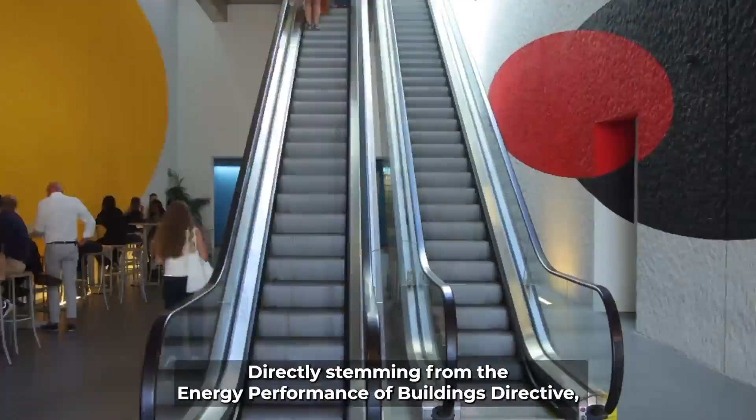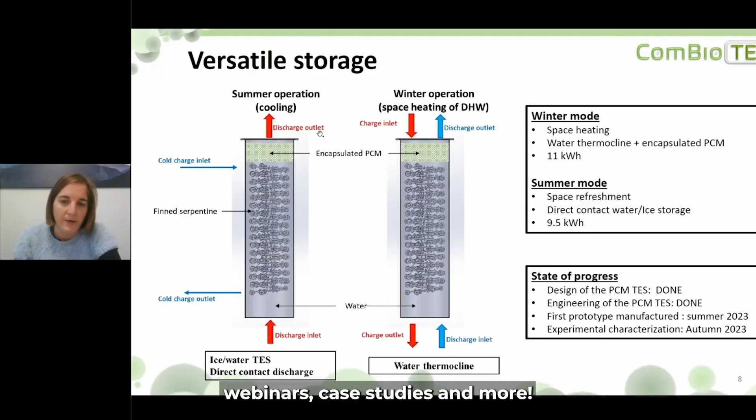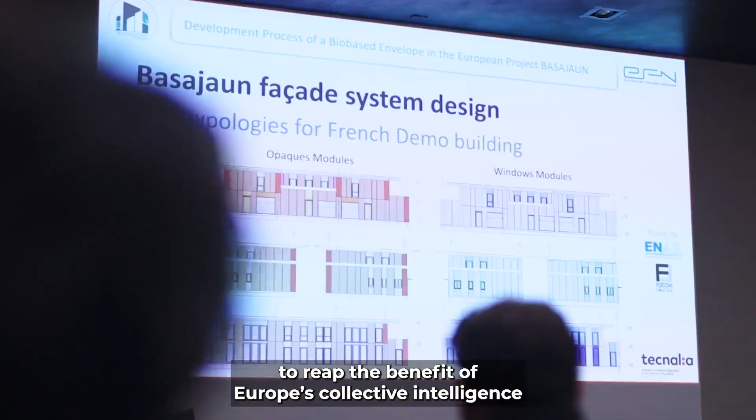Welcome to Build Up, the European Commission's portal for energy efficiency and renewable energy in buildings. Directly stemming from the Energy Performance of Buildings Directive, Build Up is the meeting place for everyone involved in making the European building and construction sector more energy efficient. Every month we focus on a topic that is key to making Europe's buildings as energy efficient as possible. Exploring that, you can find the latest content such as expert talks, webinars, case studies and more. From architects and engineers to academics and policy makers, we've got you covered. Build Up brings together thousands of registered members to reap the benefit of Europe's collective intelligence on all aspects of energy efficiency and renewable energy in buildings.

The Build Up portal benefits from the expertise of our ambassadors. Drawn from industry and academia, the ambassadors bridge the gap between EU and national level and help shape our editorial content. Want to promote your work?

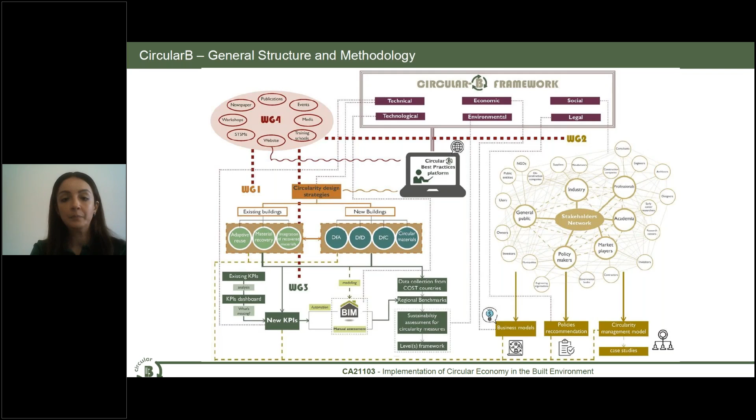Working Group 4 is responsible for the dissemination of our results through publications, events, media, websites, etc. Our final output is the CircularB framework with 6 dimensions: technical, technological, economic, environmental, social, and legal. Following this methodology, our projected outcomes are listed in this slide.

We'll have the state-of-the-art synthesis. We are currently working on a report analyzing the different types of barriers facing circularity implementation in buildings. We will be delivering a report on innovative solutions and best practices. We're about to launch the e-learning platform on the CircularB website, focusing on best practices.

Other topics include business models and financial studies, standards and policies at multiple levels, the management model for circularity supported by case studies, and the circularity KPIs dashboard, which will contribute to our ultimate goal of delivering a circularity inclusive framework and tool, later integrated into a broader sustainability perspective and automated within a BIM environment.

Our achievements to date include a book we managed to publish at the beginning of this year. It's a roadmap towards circularity in the built environment and includes the proceedings of our first workshop, dealing with different topics about our action themes.

We are currently dealing with the publication of our deliverable tool, a systematic state-of-the-art that follows a systematic approach to circularity in buildings, starting from materials through building systems to individual buildings and ultimately to the urban built environment. We've also published some journal papers on different topics, and standards and policies reports at international, national, and European levels.

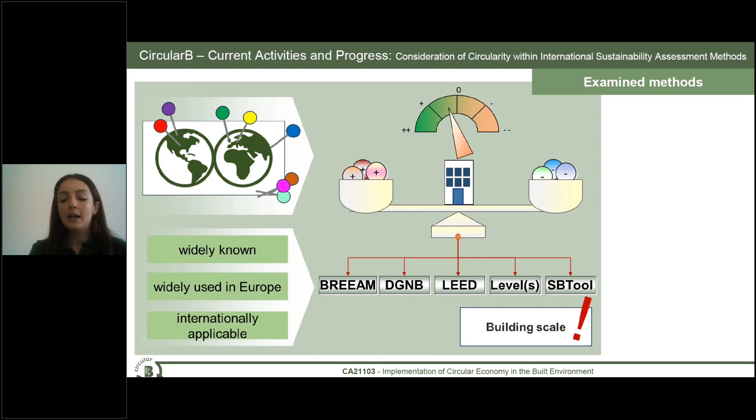The third activity that I'm going to present today was held within WG3, and it was about the consideration of circularity implementation within international sustainability schemes. So what we did in this activity is that we analyzed the relationship patterns between circular economy and sustainability, and we highlighted the differences and the borderline between the two concepts to use eventually a circular economy framework for the waste hierarchy, the 10 R's principle, let's say, to be analyzed within 5 well-known sustainability schemes: BREEAM, DGNB, LEED, Level(s), and SBTool.

So what we did within this activity is that we created expert groups, each responsible for one of the 5 international sustainability schemes, and each of the experts analyzed each R principle implementation within each credit, indicator or criterion of these 5 frameworks. Actually, we got some pretty interesting results, and I would like to invite you all to consult the results in our D2 that will be published very soon regarding this research.

So the final activity sample that I'm going to present today is the circular economy key performance indicators dashboard that we are developing also in working group 3. We started working on the dashboard this year, started in November, and we are going to deal with the categorization of different indicator types over dimensions and factors for circularity and sustainability. We're going to consider also process factors, contextual factors, including the political, cultural, local, and regional factors.

The indicators also are going to be classified according to their scope, whether they are addressing a whole building level, a specific system level like a structure or the envelope of a building, or whether they are addressing components and materials. We are also considering the classification of the indicators over the different life cycle stages of buildings. And we are using as references different tools and frameworks that are existing in the literature, standards and ISOs, and also circularity implementation patterns within sustainability frameworks.

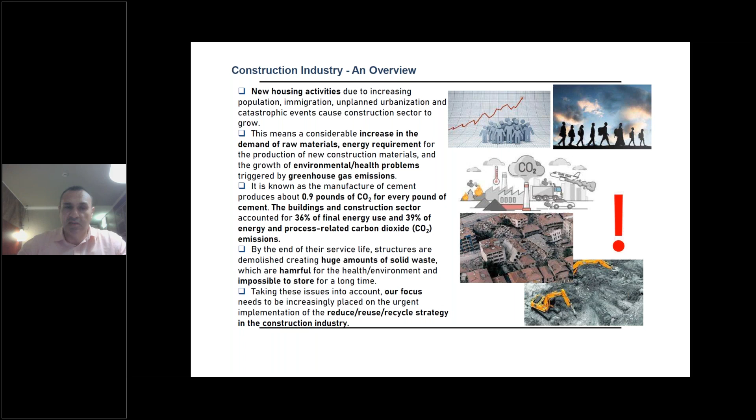For example, just during the production of Portland cement, around a ton of carbon dioxide emissions per ton of Portland cement are released, plus around 2 tons of raw materials will be used for the production of each Portland cement. In addition, a significant amount of construction and demolition waste is generated as a result of activities such as maintenance, repair, and demolition of buildings, and their direct discharge to landfills causes great damage to both environment and economy.

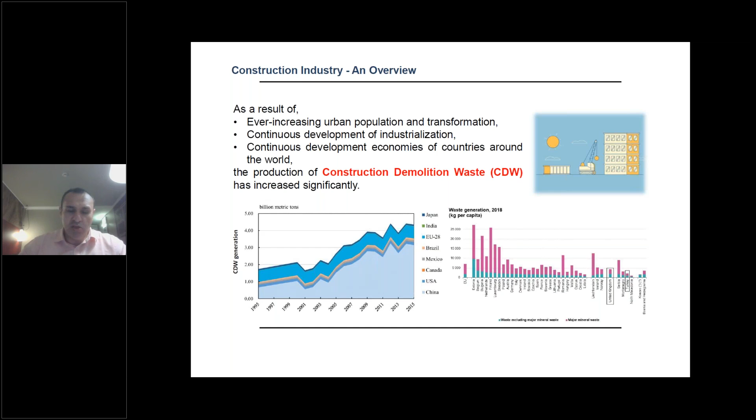So the random disposal of this construction and demolition waste is a major environmental threat, not only for our country, but all around the world. And at the same time, not reusing these waste materials is contrary to the concept of the circular economy. These graphs in this table show the amount of construction and demolition waste generated worldwide, which has reached, unfortunately, billions of tons.

As I said at the beginning of my presentation, on 6 February 2023, 2 earthquakes with magnitudes of 7.7 and 7.6 occurred in Turkey. The 2 major earthquakes caused damage in an area of approximately 350,000 square kilometers, affecting 14 million people and 16% of Turkey's population, and at least 350,000 buildings were destroyed.

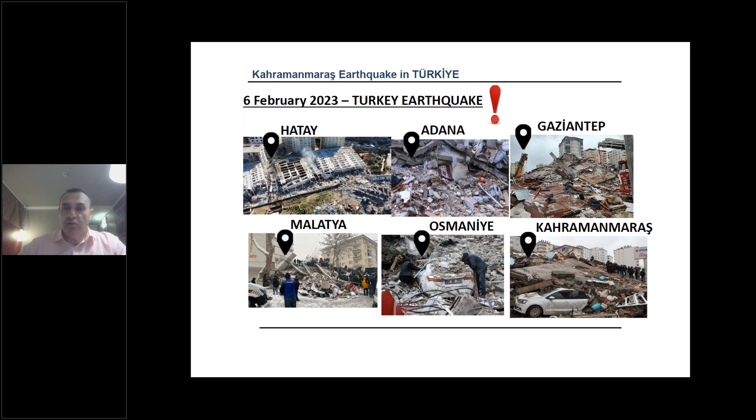Unfortunately, with the material and moral damage and the loss of life, the earthquakes have severely affected our country. It is clear that we need to work seriously to rebuild the earthquake zone and to ensure the continuity of our lives.

We made lots of investigations in the earthquake zone, and they showed that approximately 400 million tons of mixed earthquake waste was generated. This mixed earthquake waste includes concrete, stones, tiles, bricks, glass, plastic, different kinds of metals, and automobile parts. I can easily say it's not possible to recycle them in bulk, so they should be carefully separated one by one according to their types.

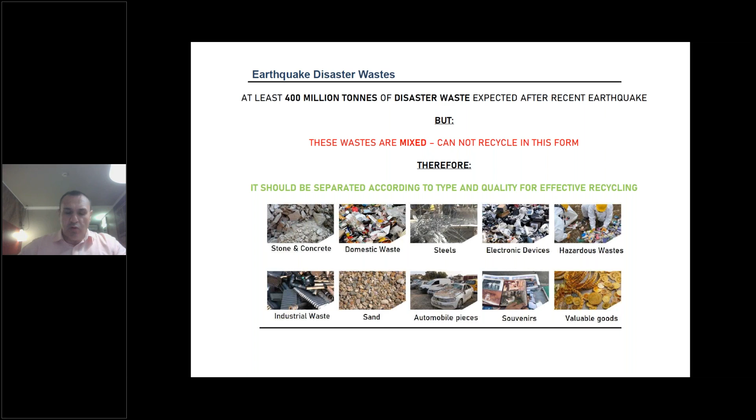By separating this waste, it will be re-evaluated easily in the construction industry and will provide significant economic and environmental benefits. Although the management of hundreds of millions of tons of earthquake waste may seem complicated at first glance, earthquake waste that is carefully organized and expertly managed can rejoin the value chain in our country and in the rest of the world.

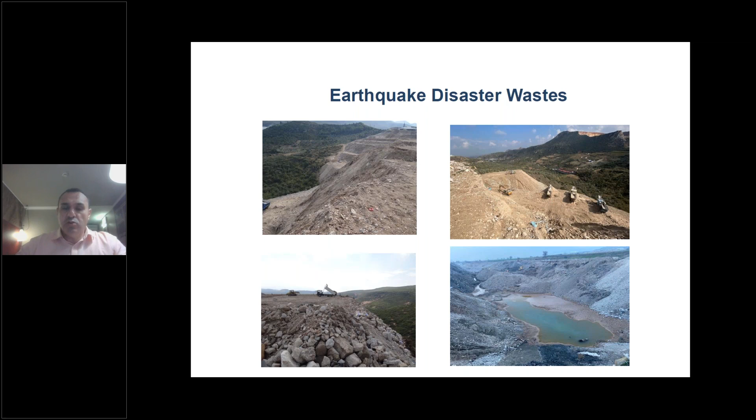Here, I just want to show some photos from the deposit areas in the earthquake zone. As you can see here, the problem is huge, and the waste generated after the recent earthquake is currently being deposited in forested areas, pastures, riverbeds, coastal areas, and agricultural lands. Moreover, the potential for reuse of the waste is not being considered when selecting these disposal locations.

In recent years, at Hacettepe University, we completed several projects on the valorization of different construction and demolition waste products. Today, I would like to briefly mention the case studies or best environmental practices that we have conducted in the recent 10 years. In this context, one of our projects with real case studies is titled Lego Construction System of Green Structural Components for Low-Cost Housing, which was supported by the UK government and the Turkish government.

Our ultimate goal in these projects is to develop alternative building materials to Portland cement concrete by geopolymerization of construction and demolition waste, and to develop Lego-type modular demountable structural elements using this concrete. In addition to these products, we developed special techniques to capture carbon dioxide into the construction and demolition waste permanently, where this carbon dioxide is obtained from the flue gases of different industries, for example, the Portland cement industry or steel factories.

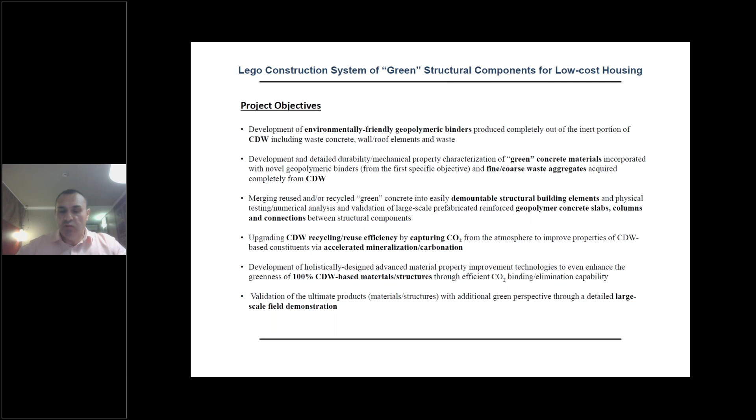And according to the results we obtained from the first part of this study, we also carried out a real field demonstration application with the products that we developed throughout the projects. So this is the first phase of the projects. In the first phase, we collected construction and demolition waste separately from different demolition sites and subjected it to crushing and grinding process, just simple crushing and grinding. But the most important thing is to selectively collect the construction and demolition waste.

According to initial findings, we realized that the physical and the chemical properties of these wastes may vary from one region to another. We characterized the waste collected from different parts of Turkey, and we developed different recipes which perform similarly regardless of where they are collected. And whatever we found from our initial studies, regardless of their type and origin, different wastes can exhibit similar performance as a result of the proper optimization.

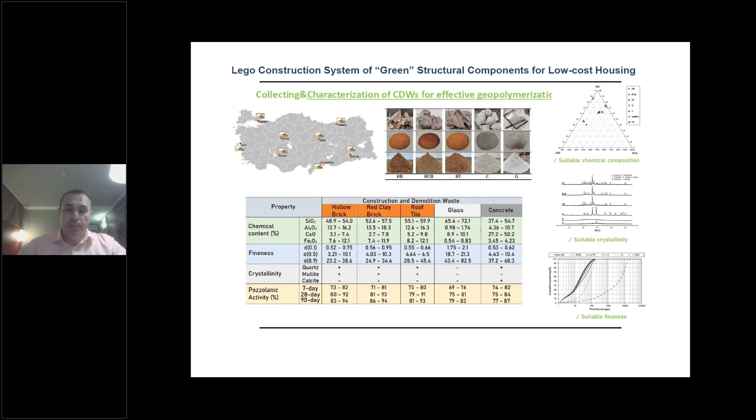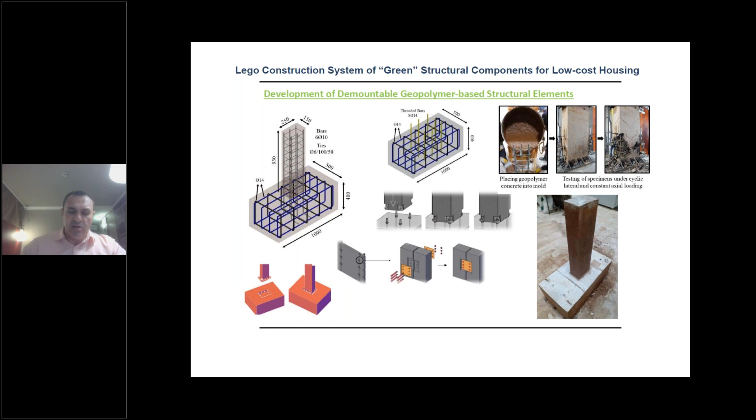In the next step of the projects, we put effort into the development of Lego-type demountable structural elements which have significant time and cost advantage in terms of the molding, workmanship, structural stability. These elements, which we produced with geopolymer concrete, passed all the structural tests including severe earthquake loadings.

At another stage of these projects, we installed a special carbonation reactor in the laboratory for carbon capture of the construction and demolition waste from the flue gases of the cement factory. But these methods can be easily applied for the flue gas of different industries, for example, steel production or ceramic production or glass production.

After the carbonation process, we have seen significant improvements in many properties of construction and demolition waste, such as water absorption capacity, compressive strength. It improves the workability of the concrete. In addition, by successfully capturing and storing 150 kg carbon dioxide per ton of the construction and demolition waste, we have achieved a significant gain in the fight against global warming and climate change.

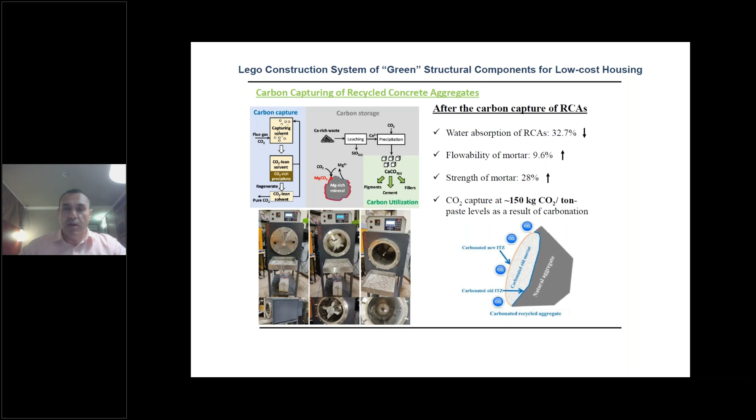At the end of these projects, we developed special structural elements and we started to work on the field demonstration activities. The construction and demolition waste in large tons had been brought to the factory where the structural elements were produced, such as columns, beams, slabs, and then with the preparation of the molds and the reinforcement process, structural elements with green concrete. Green means that 100% of the concrete was made using construction and demolition waste.

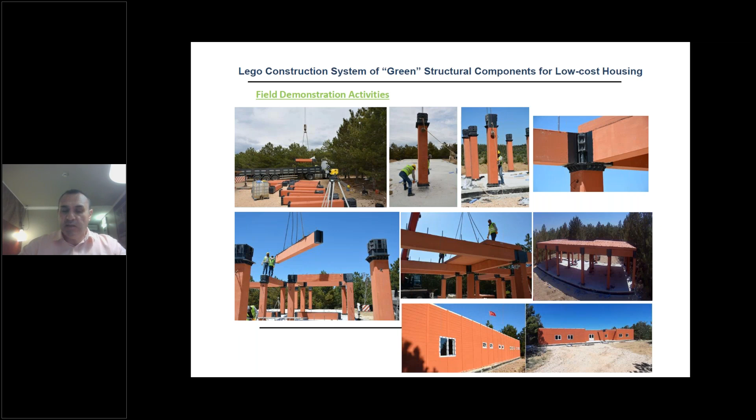Here you can see some photos taken during the construction stage, and this structure, as you can see here on the right below, with the size of 400 square meters, is the first modular building in our country entirely constructed with demolition waste, and it has been actively used on the university campus for more than 3 years.

In 2020, we initiated a new project. In this new project, we started to work on smart selective demolition of end-of-life buildings and their circular economy based solutions for various high value added purposes. The short name of this new project is Iceberg. It is supported within the scope of Horizon 2020. And after this stage, I'm going to provide some information about best environmental practices conducted under this project.

I would like to talk about our first application within the scope of the Iceberg project as a Turkish case study. Different from our initial works, in this project we conducted some studies on the feasibility of producing green wood chip concrete panels using waste wood obtained from demolition areas. Waste woods were first collected from the demolition site and brought to fiber form by crushing and chipping. We conducted special chemical treatments to remove some harmful coatings on the surface of the wood, such as paints. And we enhanced the compatibility of wood fiber with the cementitious material.

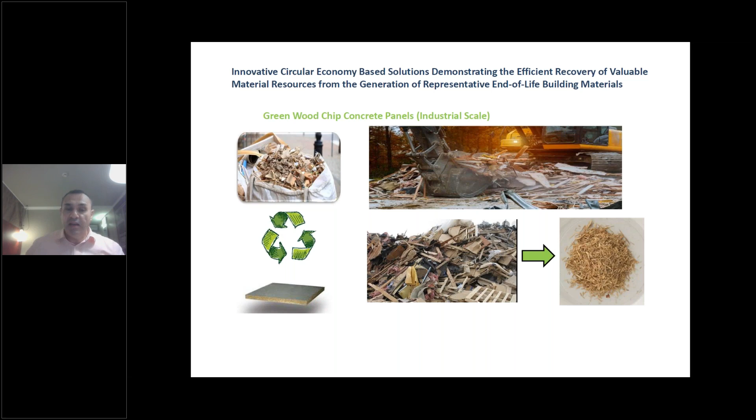When we are producing the board, we use these wood chips. Furthermore, in the production of the panels, as you can see from this figure, we used a cement developed from selectively obtained waste bricks from the demolition waste, which we named eco-hybrid cements. Therefore, both the wood and the cement were obtained from construction and demolition waste.

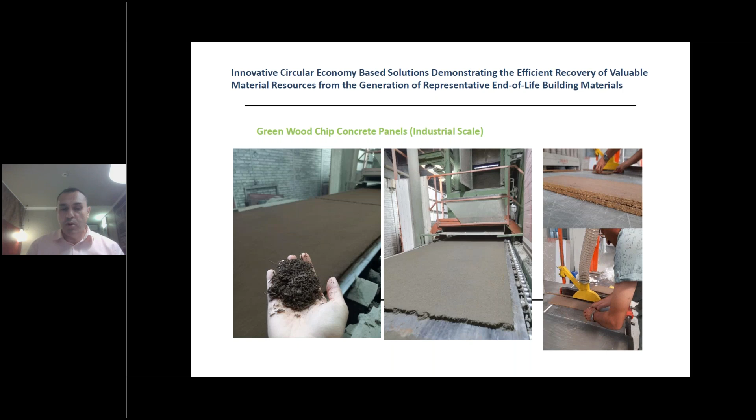And the pilot scale production has been completed by one of our industrial partners. You can see some photos during the industrial production and the quality control process. And what we obtained, the performance of the panels is parallel to the panels produced with the raw material. With these projects, our industrial partner has started using waste wood in panels, reaching a minimum of 30% in their current production process.

In this image, you can see one of the types of village houses decided to be built in the earthquake zone after the earthquake by the Ministry of Environment, Urbanization and Climate Change of Turkey. With the experience gained from our previous work, we decided to quickly build the village house with new construction technology by using earthquake waste.

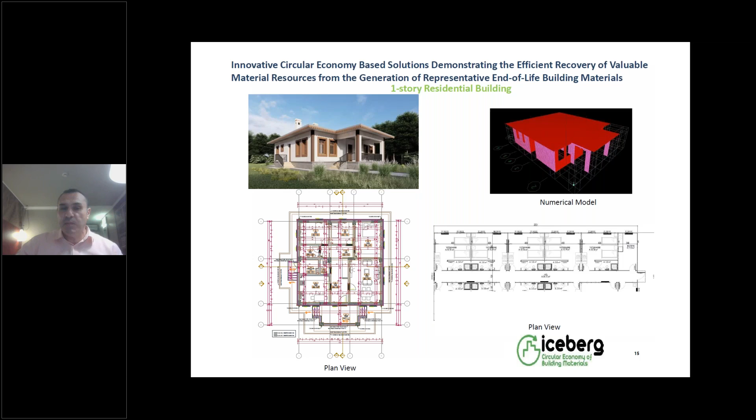In the following slides, you will see some pictures of real scale studies we have carried out under these projects. Here, in the first stage, we selectively collected concrete rubble from the earthquake debris. In total, we gathered around 1,000 tons of concrete rubble for all of our activities. The sorted materials, as you can see from this figure, were then transported to the recycling facilities.

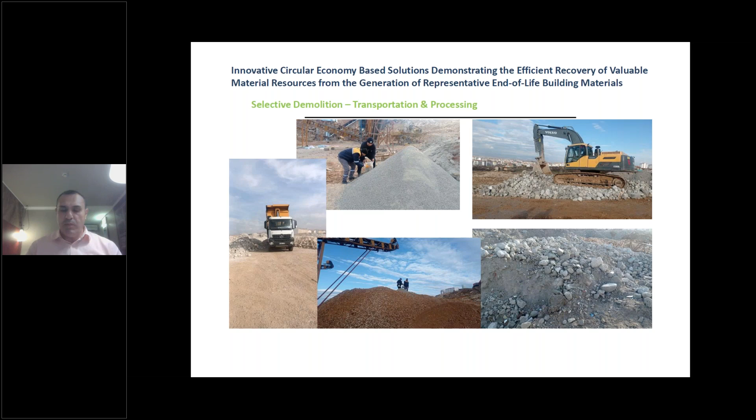Concrete waste was crushed and sieved to be used in the production of different structural elements. The brick waste material was also crushed and ground and then transported to the cement producer to produce additional eco-hybrid cement. And at the end of this process, all materials were transported to the construction site.

Here are some structural elements that we have tested on large scale. In addition to the use of construction and demolition waste during their production, one of the most interesting and innovative things in these elements is that for the first time, I think, we produce a demountable and precast foundation element. Not only the structural elements, the foundation also is a precast system.

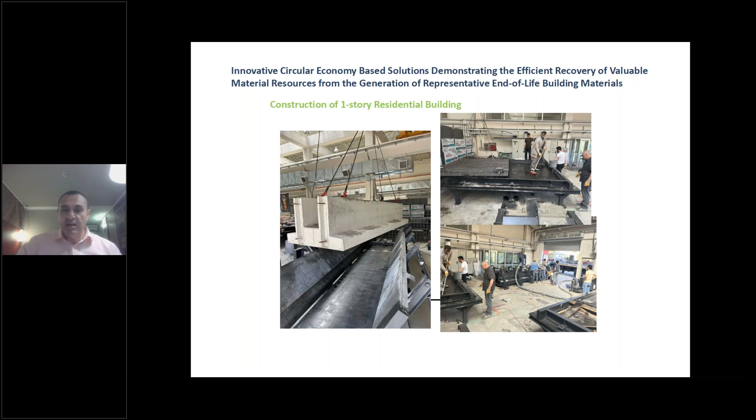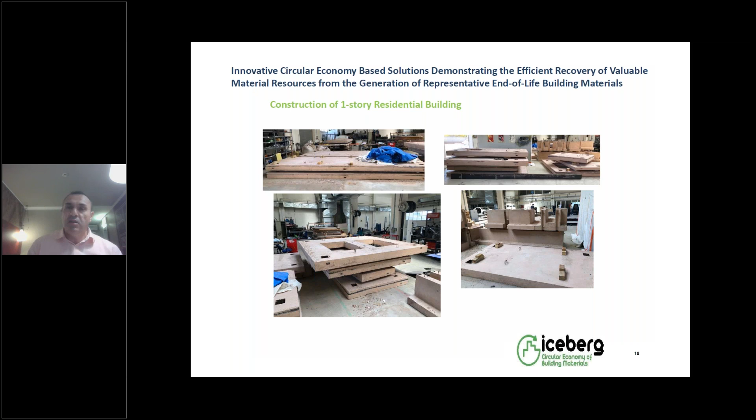And here are some images for all different types of structural elements such as shear walls, foundations, slabs, and roofs. These products have been developed with a demountable technique and will be connected to each other during the construction with the help of the connection system designed as a result of our study.

So in order to identify potential problems beforehand and to assess the feasibility of dismantling and relocating the structural elements to another area after installation, in the initial stage, we set up a small demonstration structure on our university campus. These pictures are from our department.

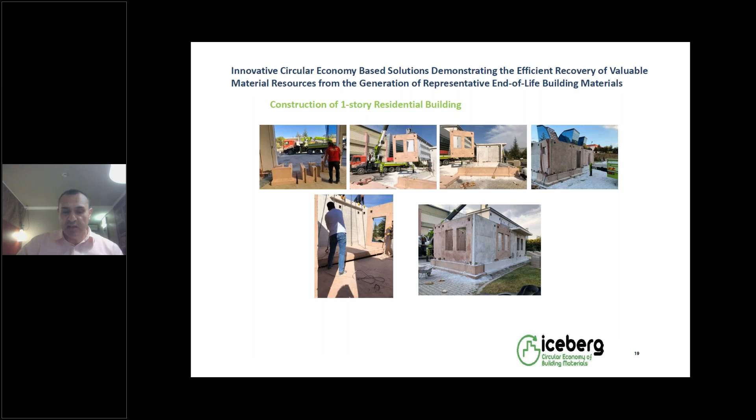You can see the installation images for the structural elements. All elements were brought to the construction site with the help of the crane and placed one by one, starting from the foundation, and connected to each other. As I mentioned, we completed a small-scale single-story house made entirely of recycled concrete, which can be completely dismantled and reassembled.

At this stage, our goal was to dismantle the structure that we had set up at the initial stage, send it to the earthquake zone and reassemble it there to serve a family affected by the earthquake. In these slides and the following slides, I would like to show some of our construction works within the scope of this study, step by step.

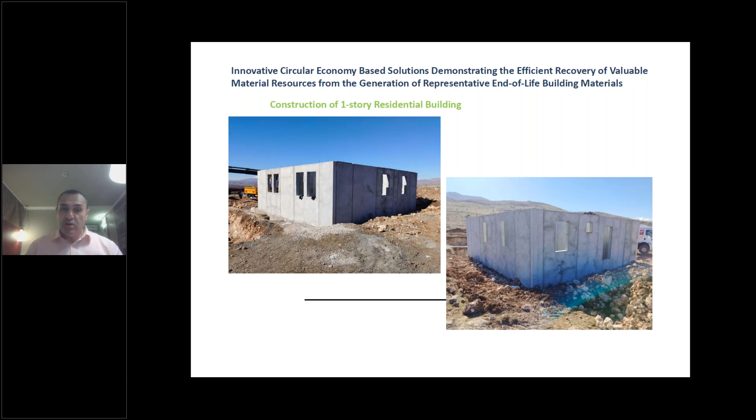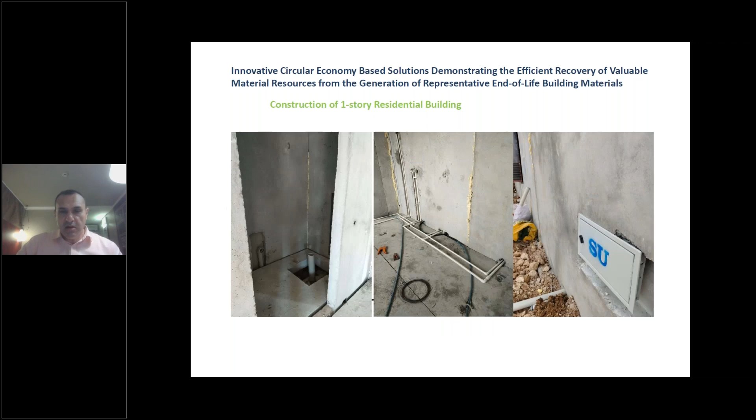At this stage, as you can see from this figure, we placed the vertical elements and the foundations. In this stage, we completed the placement of the horizontal elements and slabs. Here and in the next slides, you can see the installation of the water, sewage, and electrical systems of the buildings. And upon completing various items such as roof, door, and window installation, and the electrical and water systems, the building is ready to use.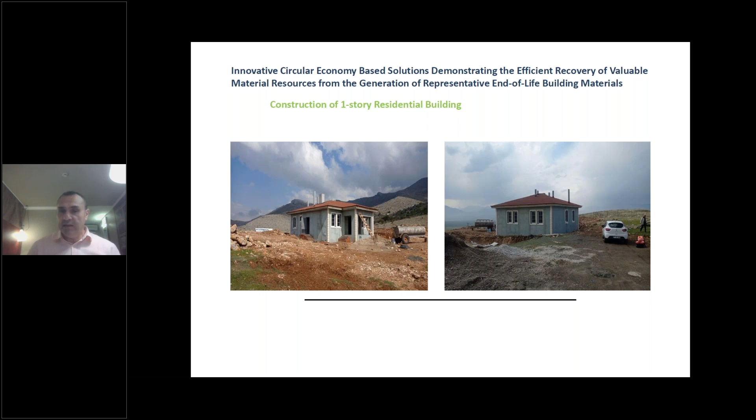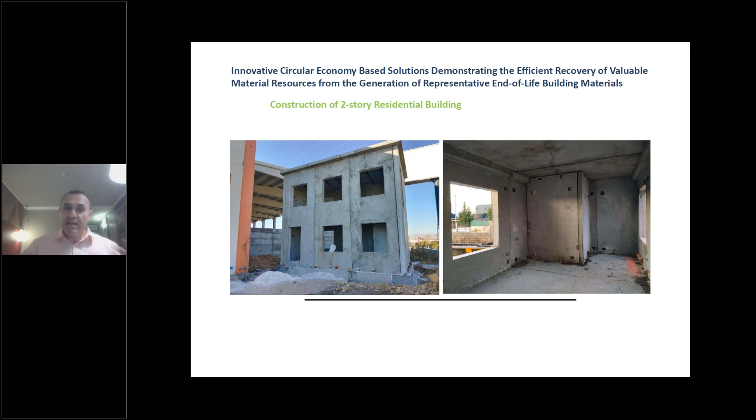So after our first successful implementation in the earthquake-affected region, our goal is to completely build one village in this manner. And within this aim, different from the first one, we started to construct two-story buildings with a modular construction system. As you can see from the figure, we completed the construction of structural elements for these buildings. The rough construction of the two-story modular buildings is completed, and hopefully in the next months, we are going to do the rest of the fine works for these buildings.

I just want to give one final example from our circular case studies. With the experience obtained from our previous works, we have started to work on the development of green concrete incorporating construction and demolition waste suitable for 3D additive manufacturing. In these new projects, we aim to combine modular construction techniques with 3D additive manufacturing technology.

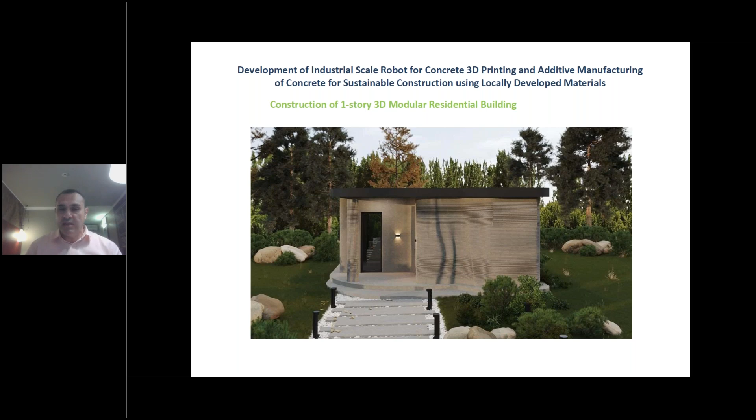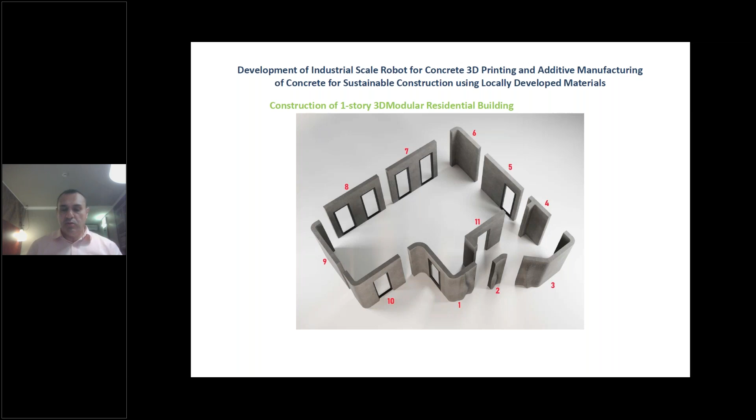And in this scope, we decided to construct more architecturally distinctive and technically challenging buildings, as you can see from this figure. And in the next stage, to ensure the construction process goes without any problem, we decided to divide the structure into the fewest possible parts and start the construction process of each part using additive manufacturing, different from our first studies. And after dividing the structure into 11 parts, we proceeded to the printing process.

In these slides, I would like to show some pictures depicting the final state of the buildings that we constructed in recent months in Turkey. We spent approximately 30 days from the planning stage to the completion of each part, allowing sufficient time for curing and strengthening before assembling the structure in place.

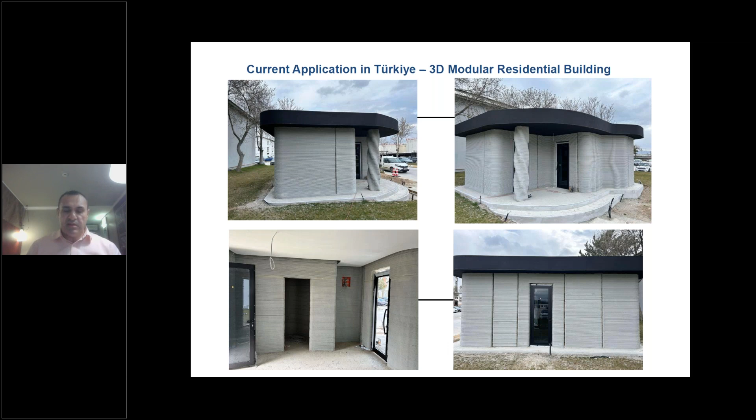In this structure, we have used the aggregates from the earthquake zone as well. And our next goal after this stage is to reduce the construction time to 1 week with the standardized projects for earthquake-prone areas or low economic level individuals. So at the end of my presentation, I have a question: why is circular economy in the built environment an inevitable necessity for Turkey and for the rest of the world?

If we look at, in general, the high level of risky building stock leads to a significant increase in urban transformation efforts, resulting in more steel, cement, brick, glass, aggregate, and concrete production, and more construction and demolition waste production. Plus, in addition to the loss of life and property caused by earthquakes or different kinds of disaster, the environmental problems are also exacerbated to much more serious levels. Emissions resulting from the construction sector are not only affecting our country, but also distributed throughout the world because there is no border in the air.

All this, along with the growing population and the internal migration, increases the negative impacts of the country's construction sector on the environment and the natural sources with an unsustainable and non-circular approach in terms of consumption and production. Therefore, it is a vital imperative for both Turkey and the world to create a housing and construction sector where all components of the sector's value chain gain an ecologically, economically, socially, or culturally sustainable identity and integrate it into

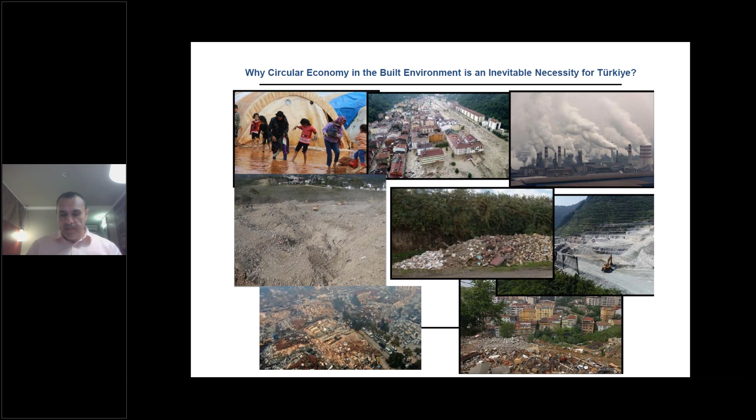the circular economy. With the experiences that we have received in the last years, I think we are ready to recycle disaster waste or construction and demolition waste or waste remaining after the war and integrate it into the circular economy by developing green construction materials.

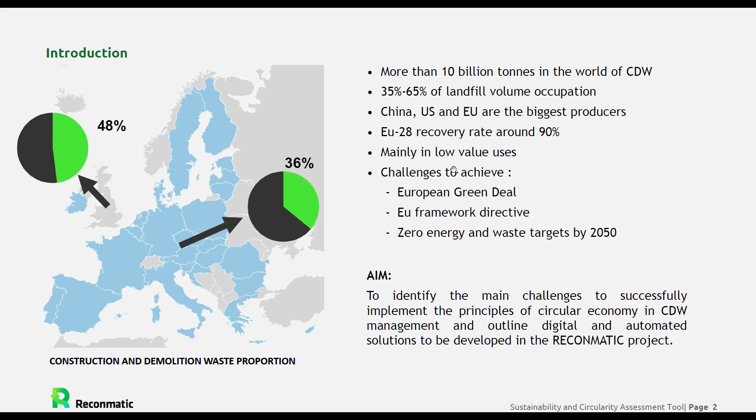The Reconmatic project aims to develop automated solutions for sustainable and circular construction and demolition waste management. Why? What are the main motivations of running this kind of project? And why does this project focus on construction and demolition waste? Well, there are more than 10 billion tons of CDW produced in the world. It accounts for between 35 and 65% of landfill occupancy volume. China, USA, and Europe are the largest producers.

In Europe, the recovery rate is around 90%. However, its main uses are low value. In addition, Europe has a number of challenges to meet, such as the European Green Deal, the European Framework Directive, or Zero Energy and Waste Target. So the aim is to identify the main challenges and to successfully implement the principles of circular economy in CDW management and outline digital and automated solutions to be developed in the Reconmatic project.

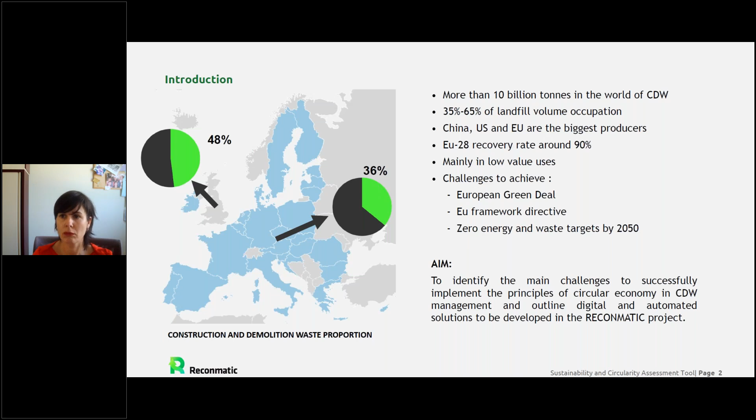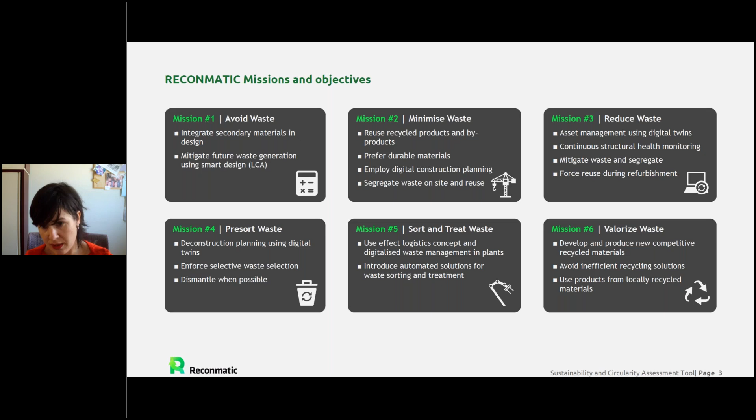refurbishment. Another mission is to presort waste using digital twins in the construction planning and for selective waste selection or dismantling when possible. Sort and treat waste using a smart logistic automated solution for waste sorting and treatment. And finally, valorization of the waste, developing basically new products.

The RECONMATIC project is organized in 7 interacting work packages in parallel over a project duration of 48 months. Work package 1 is focused on contextualizing automation in construction and demolition waste management, establishing reference values and practices, and developing a digital information management system, which will host the solution developed in the project.

Work packages 2, 3, 4, and 5 are the technological work packages, and they are focused on digital or automated solutions, covering the entire life cycle of construction and demolition waste management. Work package 6, which is the one we are going to talk about, addresses the measurement and assessment of sustainability and circularity potential.

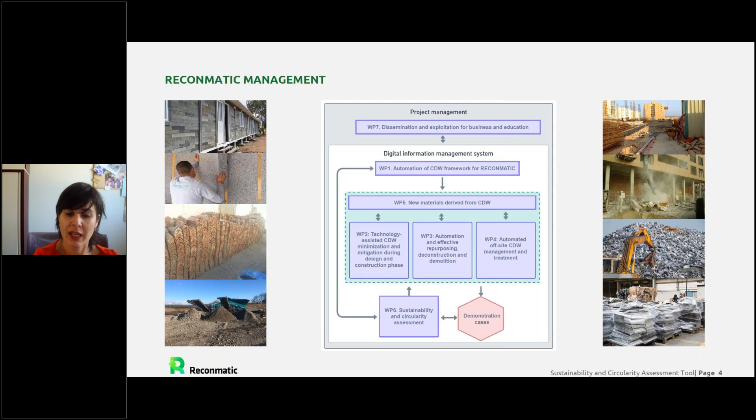It is established to support all technological packages, providing a guidance tool which will be used to evaluate each of the demonstrators, and beyond that, the tool will be available to the market after the project's conclusion. Then there is the work package of exploitation, dissemination, and coordination, organized as work package 7.

We will now look in detail at the tool for understanding, implementing, and assessing the circularity and sustainability of practices and solutions related to construction and demolition waste at the different stages of the life cycle of buildings, but also in civil construction, for instance.

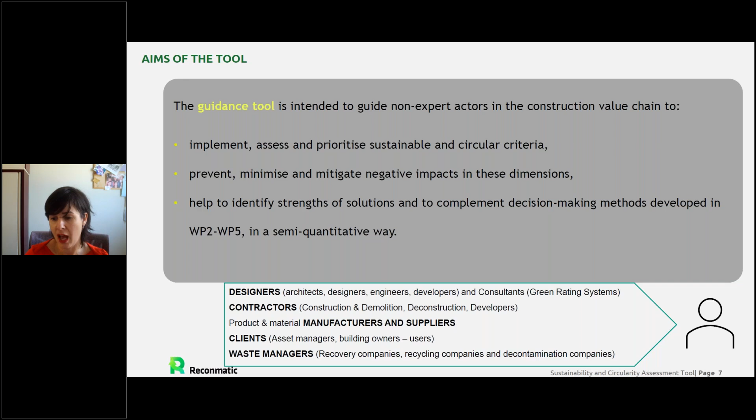This is a guidance tool which is intended to guide non-expert actors in the construction value chain to implement, assess, and prioritize sustainable and circular criteria to prevent, minimize, and mitigate negative impact in the dimensions of circularity and sustainability, and also to identify strengths of the solutions and complement decision-making methods that will be developed in the technical work packages. This will be done in a semi-quantitative way.

Why are we going to develop a tool? Because there are existing methodologies, schemes, and tools to carry out the assessment of some of the dimensions of sustainability or circularity, like Levels, HQE, LEED, BREEAM, but also applied in product eco-design, eco-labels, and design for circularity. But we have found there are few initiatives to put into practice the joint integration of all these concepts together - circularity and sustainability - especially holistic initiatives specific for CD waste and its entire value network.

It's also evident that the complexity of assessment in those dimensions requires time and expertise, and often this creates limitations when one person or one user wants to evaluate some innovations.

So what is the ambition of our RECONMATIC tool? Well, it's to facilitate access for non-experts to understand and implement circularity and sustainability in their decisions. There will be an integration of circularity and sustainability altogether, considering the life cycle. So there is life cycle thinking, focused on CD waste but also applicable for a range of fields. It's able to evaluate innovation with few limitations, applicable for building and civil construction, for new or existing constructions, and integrates the entire value chain.

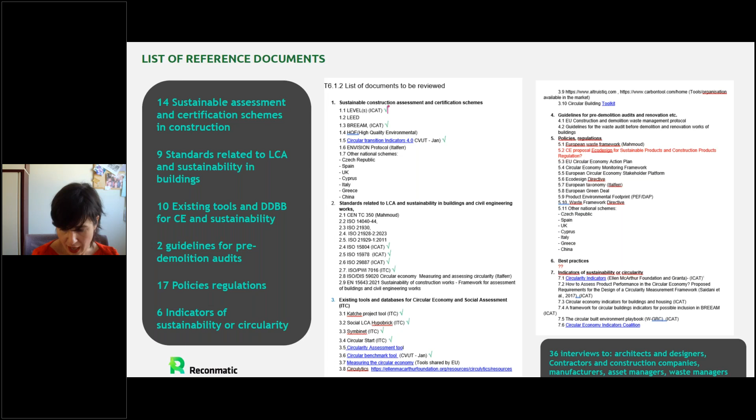So at the end, we reviewed 14 sustainable assessment certification schemes in construction, standards related to life cycle assessment and sustainability in building, existing tools and databases for circular economy and sustainability, guidelines for pre-demolition audits, policy regulations, and indicators for circularity, in order to identify the necessities of the target group and the gaps in the existing regulation, and how the integration of all of them would form.

And now let me explain the methodology. Well, it's important to say that this tool is in progress. We are in the middle of the project and developing it, so we are now working on the validation of those indicators and establishing and defining the methodology.

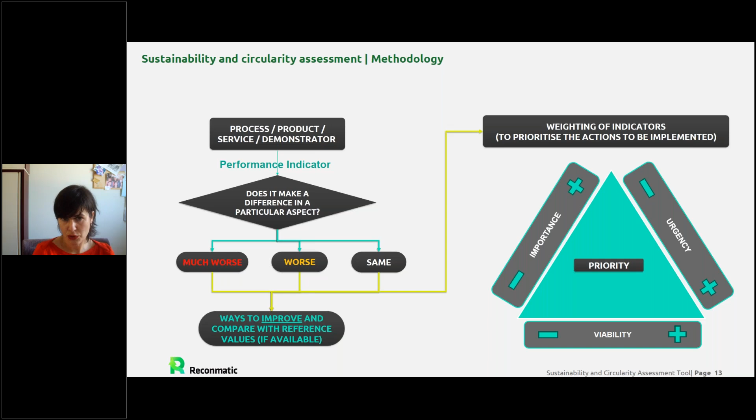By means of an equation which is under development, the tool will prioritize all the issues to address. For instance, for the indicator on CO2 emissions: if there are no changes but it's not important, the tool suggests devoting efforts elsewhere. But if there are no changes or a little increase - so it's getting worse - and this is very important or moderately important, the tool will help prioritize and give tips to reduce the CO2 emissions in this case.

So this was the methodology, and those were the dimensions and indicators that the tool is going to address. But it was very important for us that this tool is applicable, used, and adapted to the needs of the target users. So we did some interviews, we did some surveys, and now we are running national workshops in all the countries participating in the RECONMATIC project, with the objective to assess the tool methodology and also to validate some specific indicators.

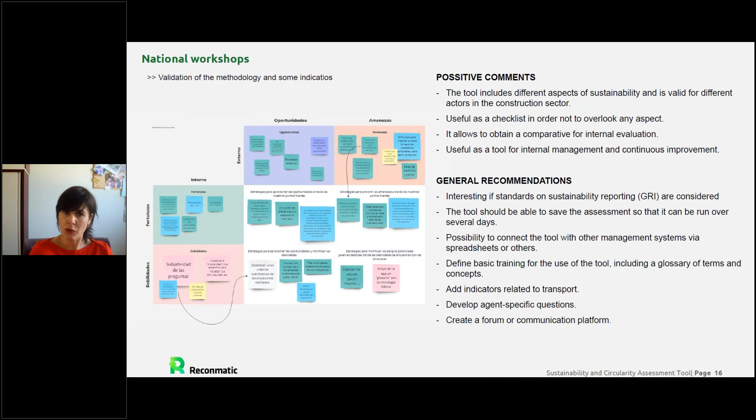And here you have some positive comments that the users are giving us, and some constructive recommendations to take into account when we develop the tool. The tool will be programmed and designed online and will be available in some months.

Thank you very much. If you need more information, you can visit the webpage or the social media, or just email me and I will be happy to answer.

So I think we are going to the next session. Yes, we are going to the questions and answer session. As we are running late, I propose that we take one question for each of you. Allow me to start with the question for you, Luis: what are the participation schemes in CircularB scientific activities?